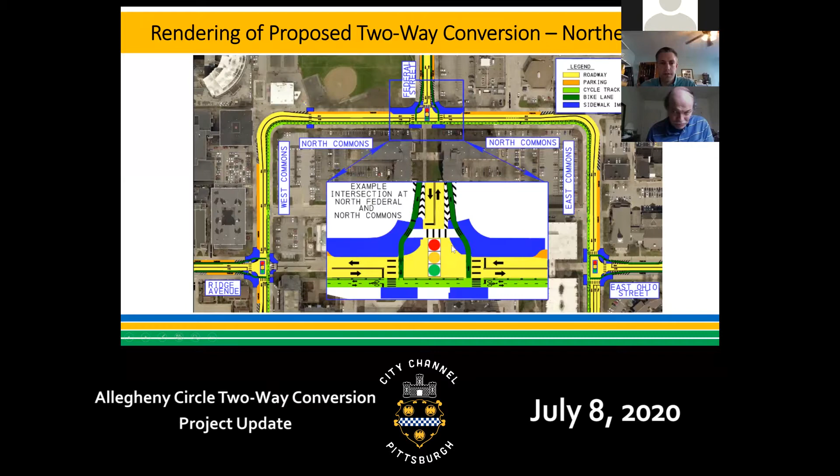Sidewalk improvements are highlighted in blue. Sidewalks already exist around the road, but especially at the intersections we'll be adding bump outs to shorten crossing distances and make pedestrians more visible as they cross the street. This is the northern half of the project, and the southern half is shown here.

The intersections follow the same basic design concept as far as the bump outs and getting the bike lanes across. We'll go into a little more detail on future slides here.

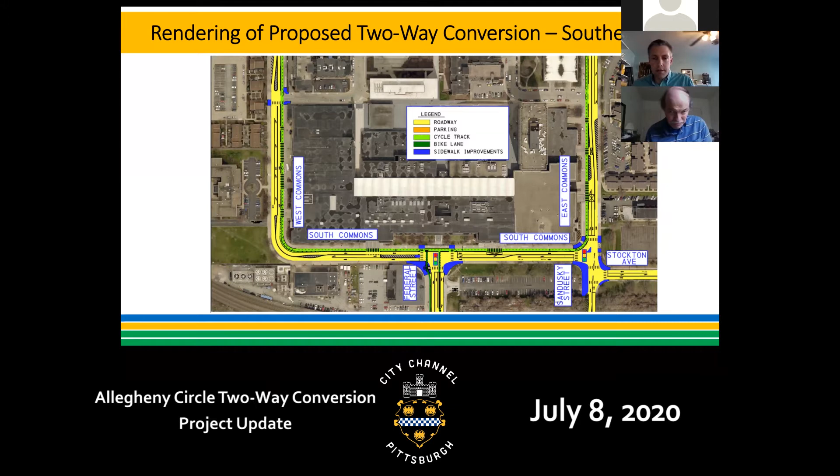As far as the project goals, we are focusing on multimodal transportation investments, which of course means more than just cars, although cars are still a very important user of this road. We're also looking at bicycles and pedestrians, being responsive to the needs of all of those users, and really treating them all equally when giving them a safe space to operate in these streets.

We're also trying to be supportive of community planning goals. One of the big impetuses here was to restore the neighborhood scale. The street was originally created with 4 lanes in one direction, with slip ramps coming in and out at the intersections, giving it very much a highway feel.

One of our goals here is to make it feel more like a neighborhood street as opposed to a highway. So we're doing a bi-directional travel corridor to create that neighborhood scale. Eliminating the outer vehicular travel lane will minimize potential conflicts at the bus stops. The bump outs will shorten crossing distances for pedestrians and bikes and give them better visibility, improving safety. We're also maintaining and improving the cycle track installed during phase 1, and connecting to the on-street bicycle facilities in the larger network to improve mobility and safety.

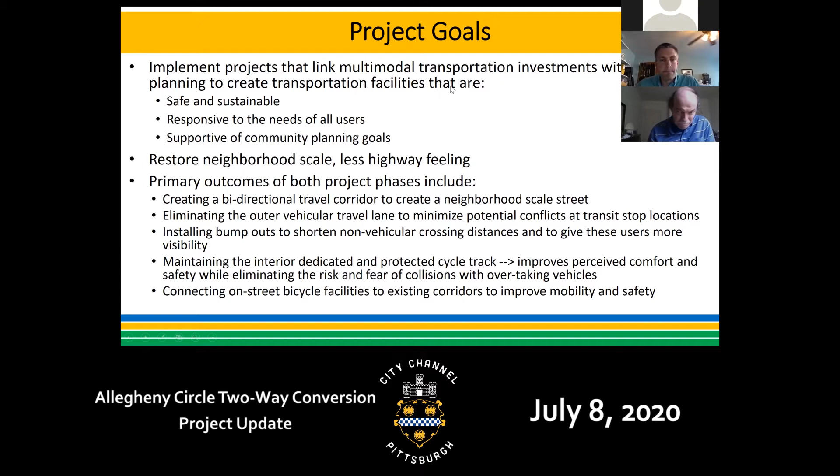Just briefly on the funding side: design was funded at about $500,000 total, funded through various city sources, the bond and pay-as-you-go money, and some community development block grant money, which is federal money that comes to the city for use in certain areas.

The construction cost is just over $3 million. Approximately 50% of our funding is coming from federal sources, with two grants going towards this project: one from the Southwestern Pennsylvania Commission, a smart transportation grant, and the other from PennDOT's Congestion Mitigation and Air Quality Program, which funds projects that reduce congestion or improve air quality. The remainder is coming from the city, primarily bond money and a little more CDBG money.

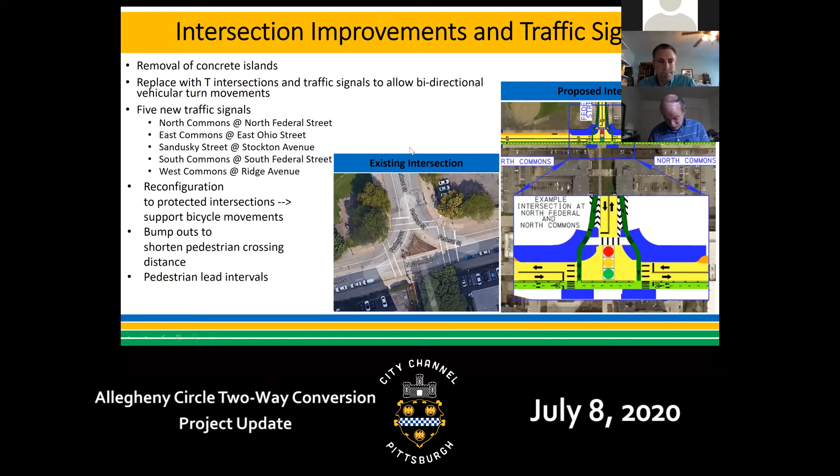Of course, as we have opposing traffic now, we don't want anyone drifting across the yellow line on a curve. So that is why the travel lane is widened out a little bit going through the corner.

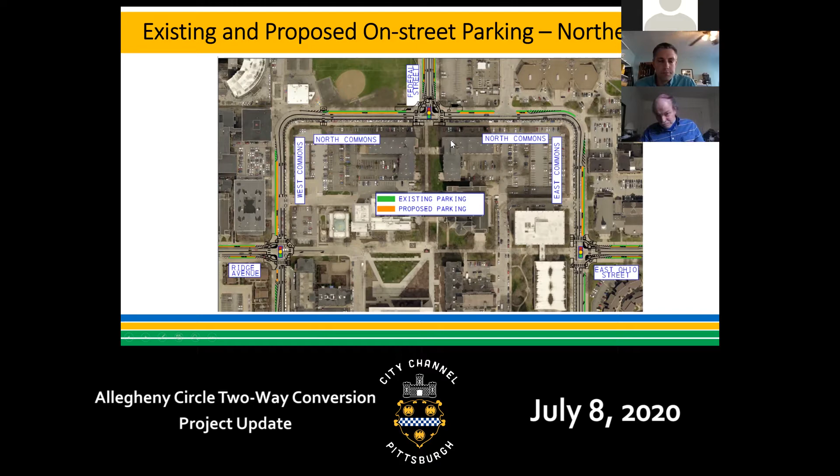This was a result of looking at our traffic modeling and attempting to balance the needs of all of our users. Coming up Federal and heading over to East is a fairly major movement - there's a lot of vehicles going in that direction and in reverse under the new conditions here. So providing these left turn lanes allows that traffic to minimize the queuing potential as much as possible.

And of course, we have a very large parking garage here, which supports all the great things going on at Nova Place. There's a lot of new activity, which is causing this garage to be used again, where for many years it was pretty underutilized. But of course, there's a lot of folks getting into and out of that garage, so these left turn lanes will help facilitate that and reduce backups that could back up through traffic.

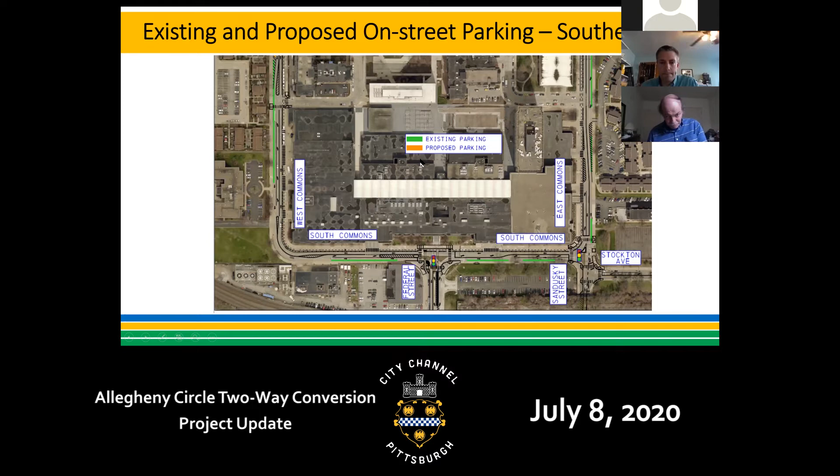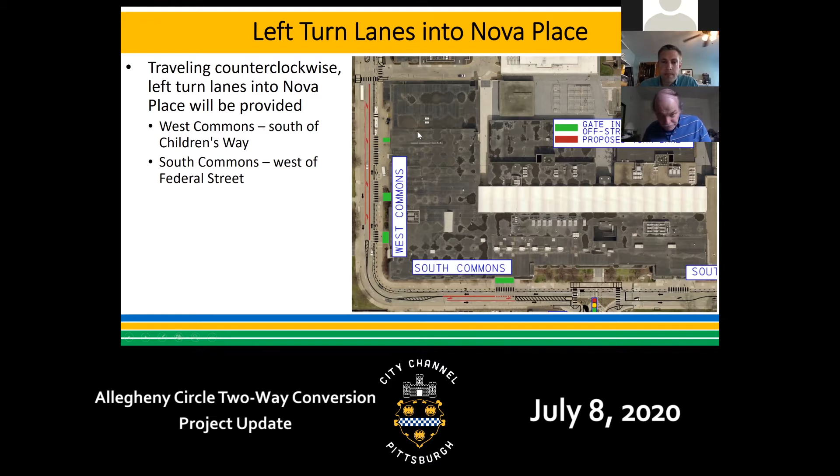So part of this is to improve the connections. In my experience using this now, the cycle track around the commons is great, but it can be a little tough to get into and out of it to connect onto other destinations in the city.

I already talked about the protected intersection design to make those movements as safe as possible. We will be extending our bike lanes out a bit to tie in along North Federal Street, tying into the bike lanes striped there going up to North Avenue. East Ohio Street, I believe they stretch out to Cedar Avenue. South Federal, we are working to bring the bike lanes down to tie into the bike lanes at the Clemente Bridge, which gets you over to the trail on the North Shore, but also down into downtown, to the bike lanes there and to points beyond.

We are in discussions with the teams, PNC, the Pirates and the Steelers, to make sure that our plans mesh okay with their uses, particularly around game days and the various events that they have going on.

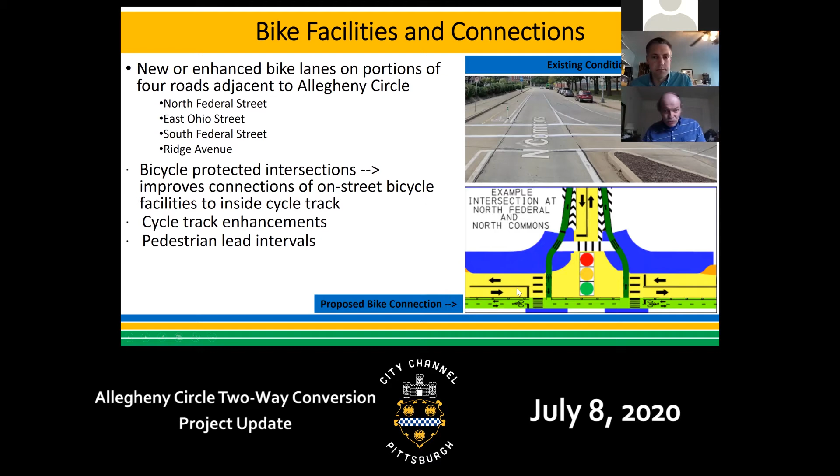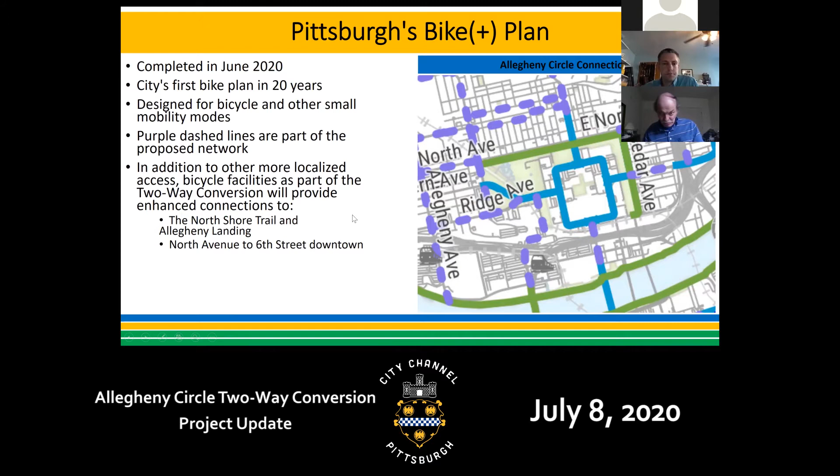We decrease the distance, and where appropriate, we are providing leading pedestrian intervals on the traffic signals, so that lets the pedestrian get out there ahead of the vehicles and establish their position in the street. There are also some new crosswalks that we're showing at various locations.

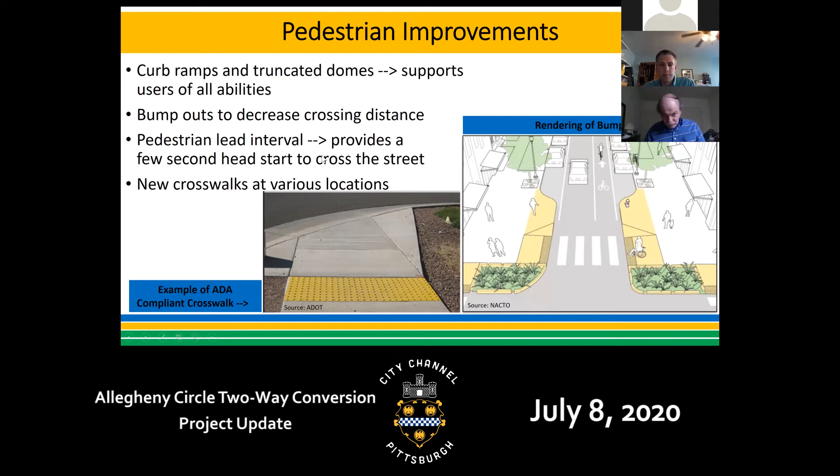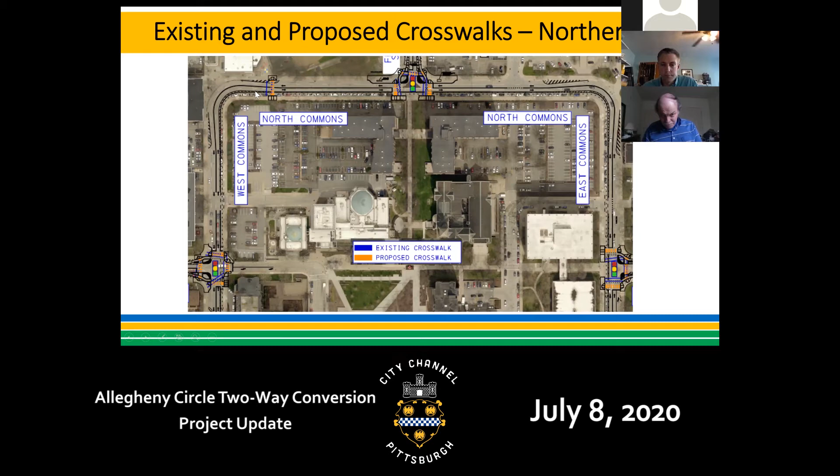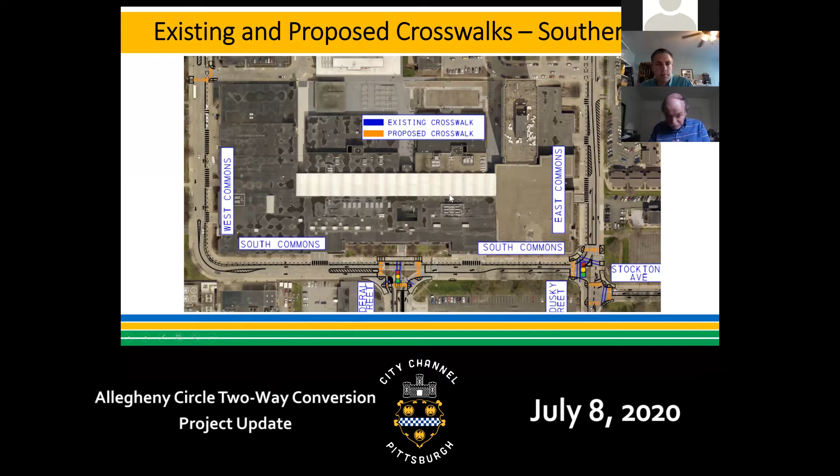Discussing the schools briefly, Allegheny Traditional Academy, which of course I pointed out was at the northwest corner of the circle.

We are including school speed zone signs with flashing lighted signs. We'll have to change that since now we have two-way operation, so we will be installing signs to handle traffic coming in both directions.

I mentioned the crosswalk that we're adding there, and we are prohibiting loading on the corner since we are widening out the lanes to ensure that vehicles can pass each other safely as they go around the circle. There is not space there to have buses queuing up right around the corner.

We are in active discussions with PPS and the school about how we're going to accommodate the bus loading. We don't have the final plan here for presentation, but we are in active discussions with them to make sure we're doing something that accommodates them and works for them while simultaneously allowing us to improve the operations and the safety on the circle.

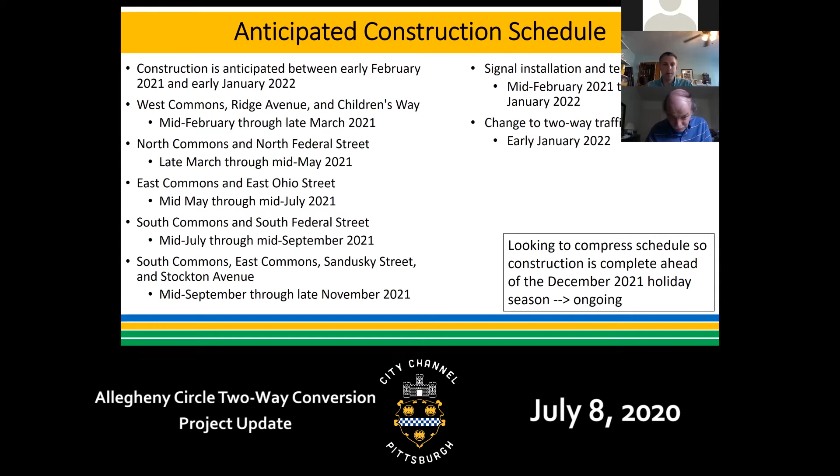So that ends the formal presentation portion of this. It looks like some comments have been coming in through the chat feature as we've been talking, so I'm going to exit out of this and turn it back over to Dara, and we can start diving into some questions and answers.

Sure. Can everybody hear me? I can hear you. I seem to be somewhere.

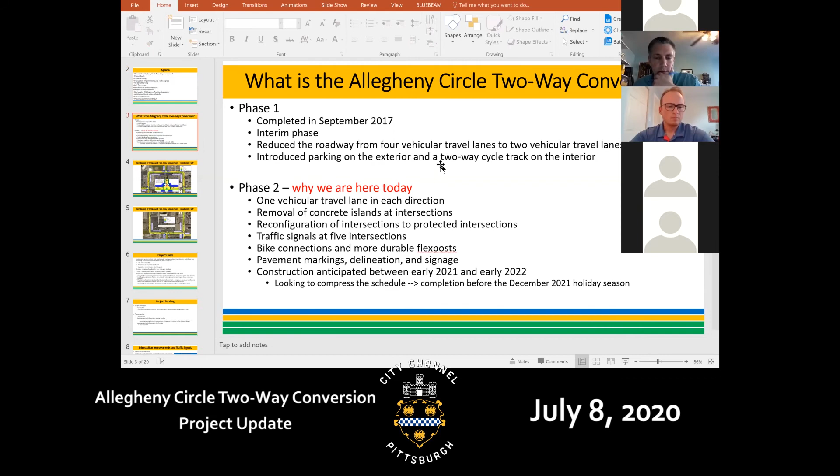Currently, the existing parking meters and kiosks on West Commons don't match up with the physical signage in place. For example, on Sunday the kiosks say it's free parking, courtesy of the City of Pittsburgh, whereas the hard signage says no parking, I believe, Sunday after 1 p.m. There's been issues with ticketing or non-ticketing of illegally parked vehicles because the kiosks don't accurately reflect the signage. I was hoping that could be addressed in the interim, and assuming this goes forward as proposed with no parking there, everything will be fine. But if modifications happen and parking along that stretch remains, we'd want the kiosk issue already taken care of. That's the first question.

Does that make sense? It does. And as you said, this project will probably make it a bit of a moot point, but that's still a little ways off. We'll have to check in, I think, with the parking authority about what their meters say, so we can reach out to them and see if there's a way to resolve that conflict in the interim. Excellent, that would be helpful.

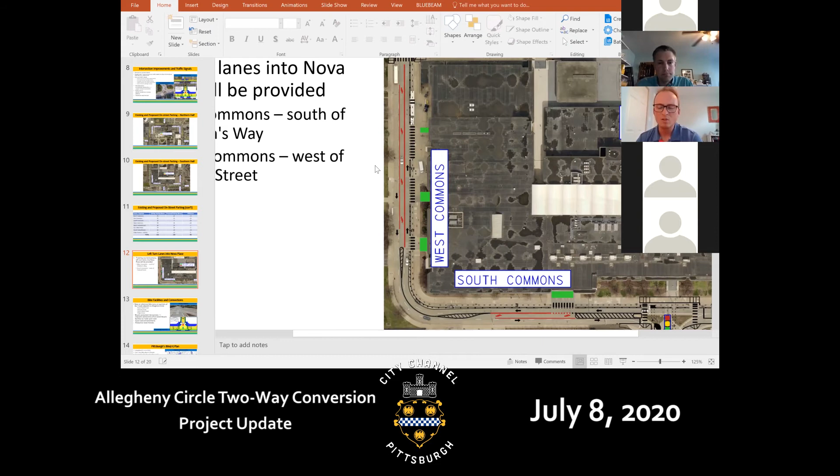For the second question, you might have to pull up a different slide showing the two Nova Place garage. Oh perfect, just zoom out a little there. Currently, I believe event access to Nova Place garage is on the eastern curb cut, kind of where your cursor is right now.

If that remains in the future, that would be problematic for event access because you don't have the left turn lane there. I'm not sure if you've had discussions with Nova Place about changing their operations to have event access from West Commons, where you have left turn lanes, or from the South Commons portion to the west, where you have that other curb cut. Yeah, we've had a number of conversations with Faros regarding the operations of the garage and ingress and egress.

I don't think most of them focused on game day operations specifically, but we certainly have discussed overall operations with them. I think I may have seen that Brad from Faros is on. I don't know if Brad, if you wish to chime in at all. We've discussed various things, but I don't want to speak for them as far as how they're going to have the garage operate.

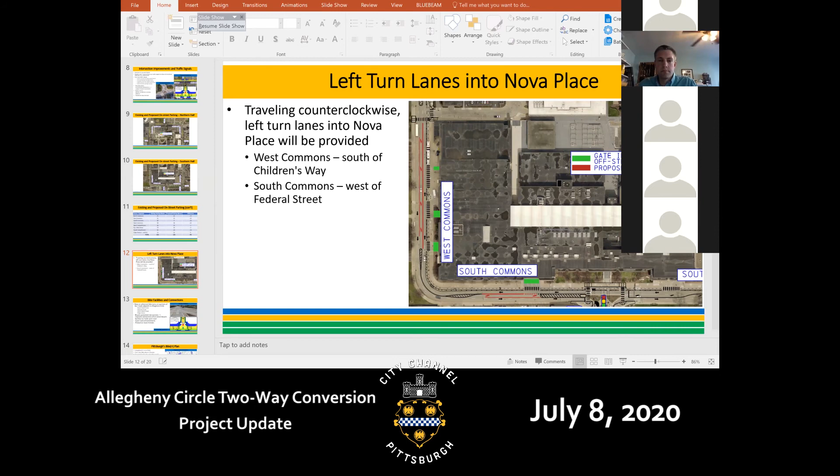So I guess to clarify, what I was saying was transit stops are being integrated into this project during the current configuration that we operate. However, to implement service to operate in the opposite direction would require that transit stops be established on the opposite side of the street as well.

Yeah, and I guess I would add, certainly it's a balancing act wherever we do a project, but we have a lot of users that want to use the street, that need to use the street, and certainly we're trying to accommodate everyone the best we can. There will be no decrease in service as far as buses go under this plan, but we want to be able to provide that dedicated space for bicyclists while still accommodating buses, pedestrians, vehicles, etc.

And Renee asked if a crosswalk could be added on East Commons mid-block where the bus stop is. We can double check on that. When we look at crossings, we like to provide crossings at intersections. As we evaluate providing additional crossings mid-block, we need to be really careful that there aren't other conflicts, turning vehicles, curb cuts, things like that. Generally the intersection is the safest place to cross, especially when there's a signal there to help you across. So we try to encourage pedestrians to head towards the intersections whenever possible, unless there's a strong need for a mid-block crossing at another location.